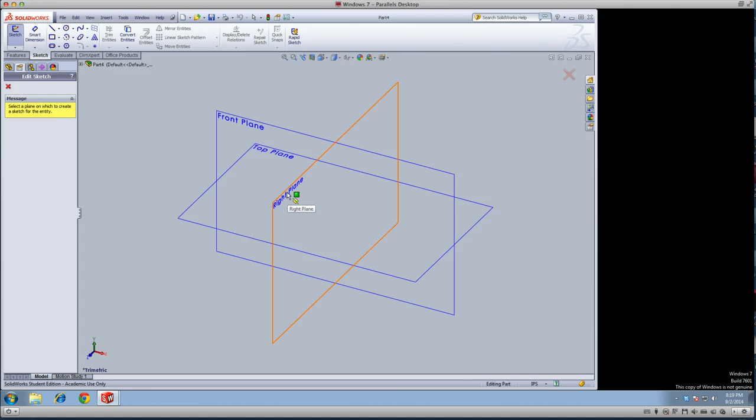Pick the line tool. I'm going to do it from the right side. If you click the space bar, you can then click this right side and make it a little easier. It's best if you start drawing from the origin, that's this red, 2 arrows. So I'm going to click my mouse and get it going in the right direction.

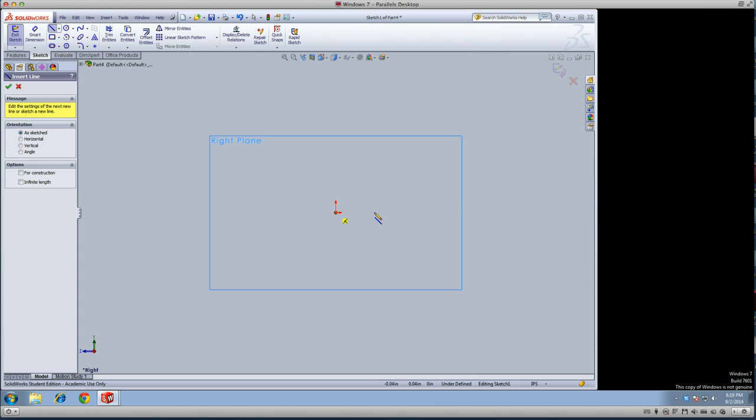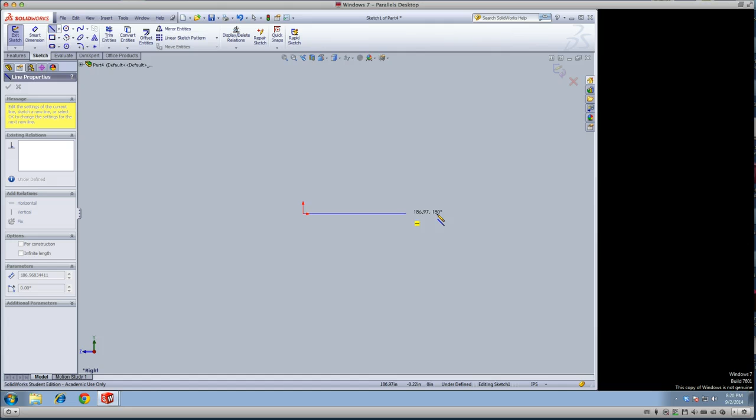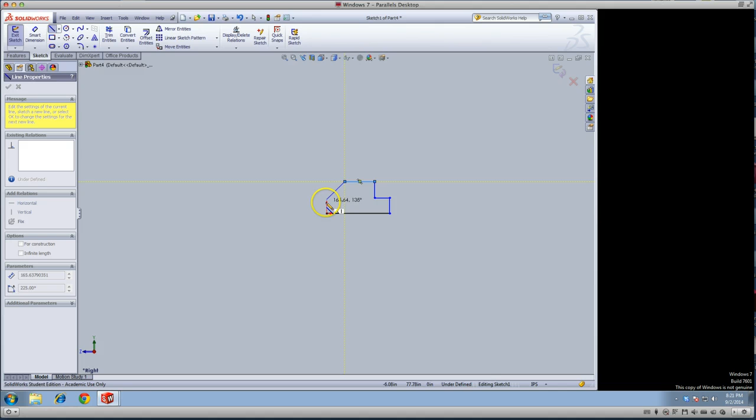What you want to do is start drawing a line. It'd be best if you could zoom out so that the line is about 400, roughly, that's good enough. Then you're going to go up approximately 100, that's good enough. I'm going to go over a little bit. I'm just kind of doing a general sketch right now. And this last part here, so once you have this, it's time to Smart Dimension.

Click the Smart Dimension. I'm going to do this first line here. Left click to place it. Type in 400, then enter. I don't select inches or anything like that, just do 400, enter. The command's still active.

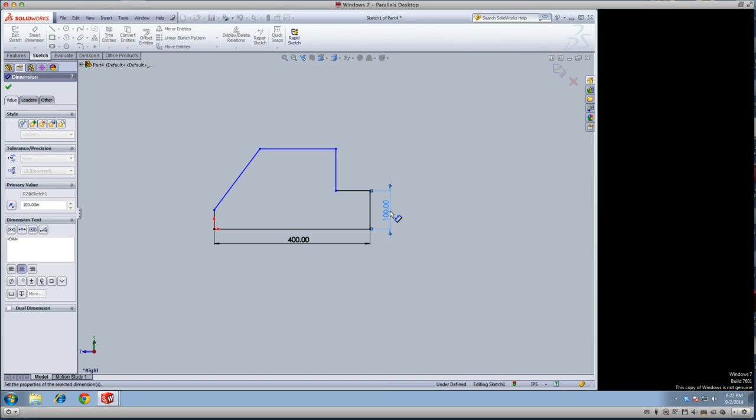So I'm going to go over here and type in 100. And then on this part, it's also 100. And then on this part, if you look at the sheet, it's basically going to be 100.

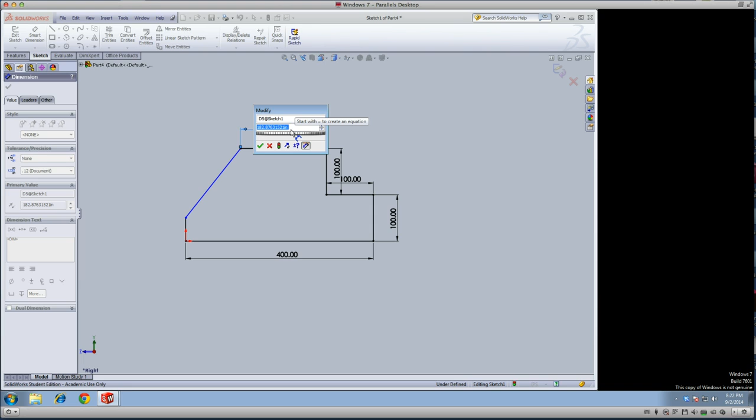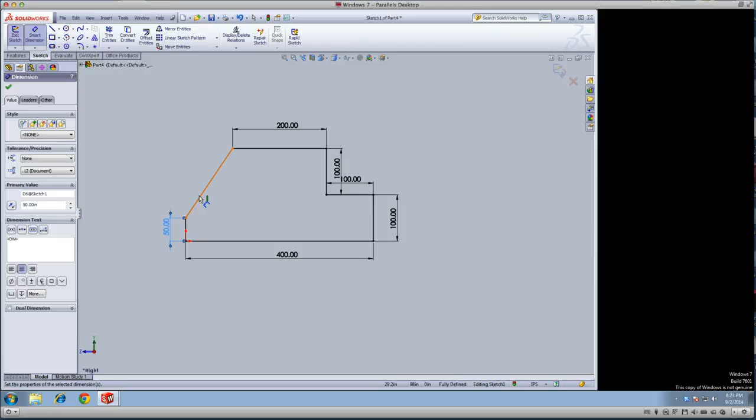And then this one is 50. And then this dimension right here is basically unknown, because everything else is dimensioned, this is correct. We can measure it if we want to, but if we're following the drawing, we don't have to know what it is.

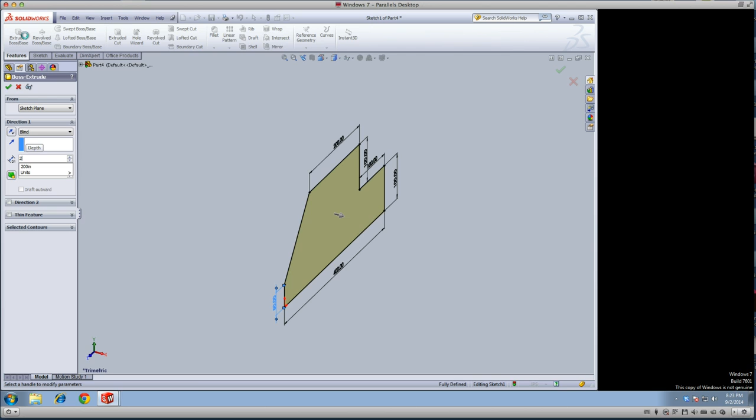All right, so now you can go to Features. You're going to extrude this thing. And what you want to do is go to 200, and then hit the green checkbox.

All right, so cool. At this point, you can hit the space bar, and it's looking good. You might want to save this right now.

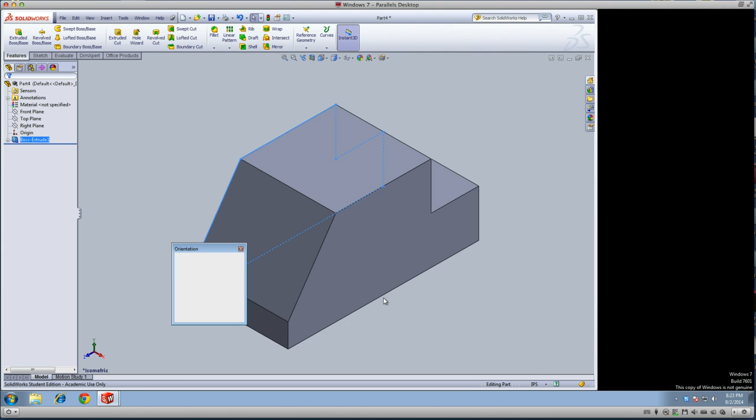Hit the space bar, and from the back side, so I click this and hit the back side. I'm going to go ahead and draw in a rectangle right now. There's more than one way to do it, I could also just do a line tool, but I'll just do a rectangle.

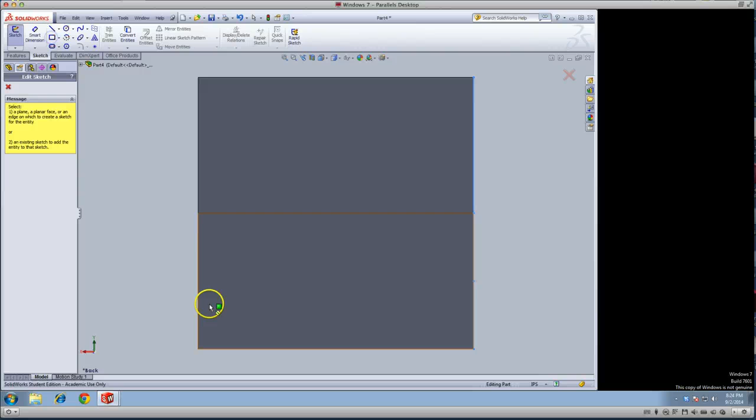Basically it's going to be somewhere, left click here. Sorry, first you have to click the sketch, it turns blue. That tells the computer you want to do a new sketch, that's important. Now I can do the rectangle tool, left click, and I can go up here and go left click.

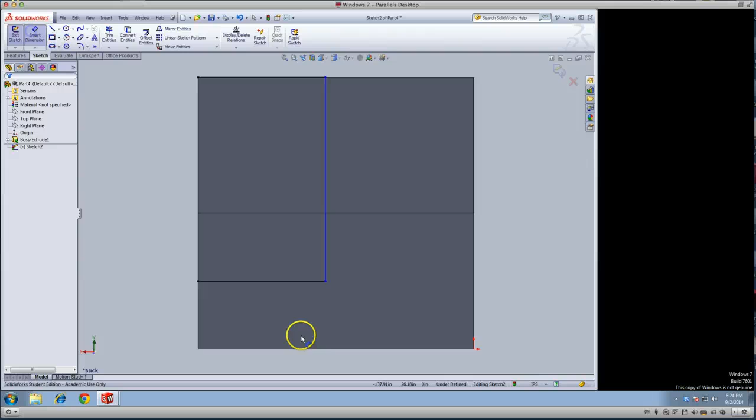Go to Smart Dimension. So what's this dimension going to be? You have to look at the plan, it's going to be 100. But you need to see that on the drawing, not just take my word for it. You have to know why it's there.

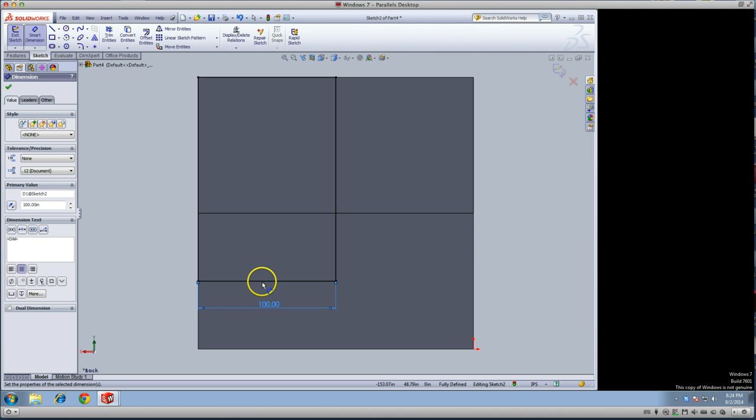And then the other thing is, how far is the dimension from the top? You're going to left click one time, then left click a second time, and it's going to be 50, which is already set. It's giving you an error here saying this is already dimensioned, so I'm going to hit cancel.

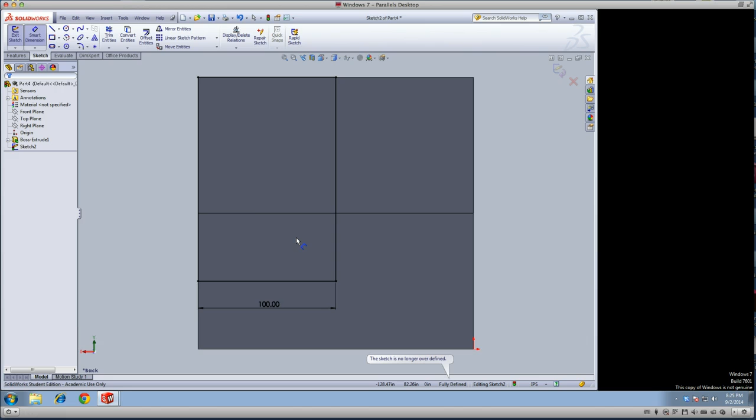All right, so at this point, we're ready to go ahead over to features and do extruded cut. I would hit the space bar so you can kind of see what you're doing, or you can go over here and just pick the isometric.

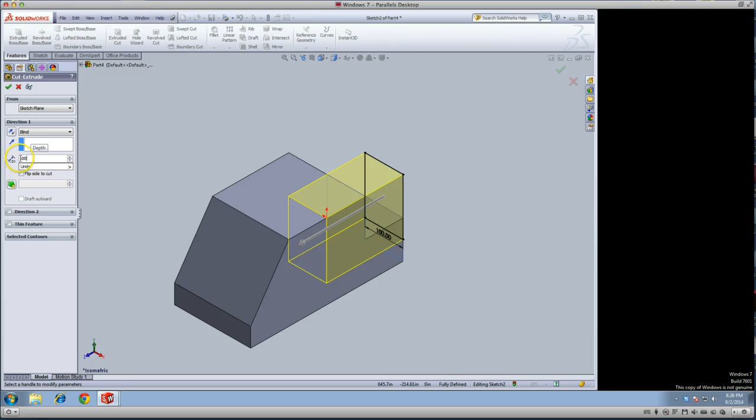And I would go through all, if it let me pick it right now. Since it's not, go ahead and make sure I'm going the right direction. Put in a big number like 500, make sure you're going through the whole thing.

And that's done. At that point, this drawing is done, except for you haven't put it in a drawing and done dimensioning, but it's done. So save this as P1-33 and move on to the next drawing.